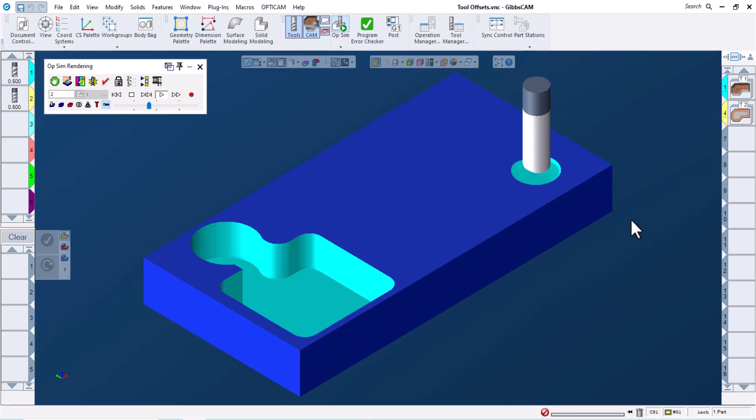In this video, we'll take a look at using operation data to create different tool offsets for different features machined by a single tool to give us more control over individual close tolerance features at the machine.

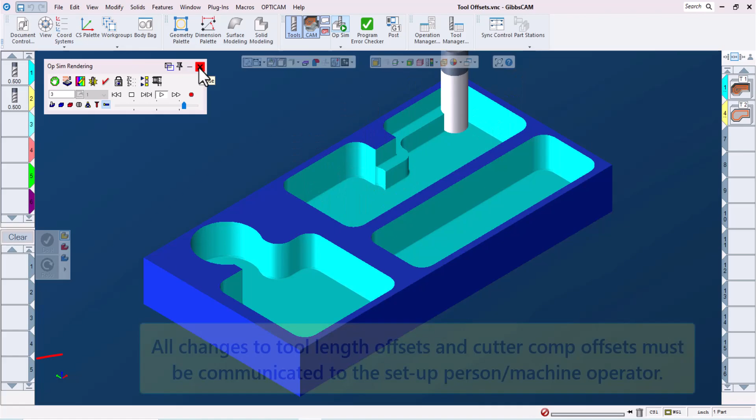If we have a part with multiple close tolerance features, it's possible to get into a situation where adjusting the cutter comp offsets to tweak one feature into tolerance could potentially tweak another feature out of tolerance. So the question becomes, how can I assign cutter comp offsets as well as tool length offsets, if necessary, to different features using the same tool?

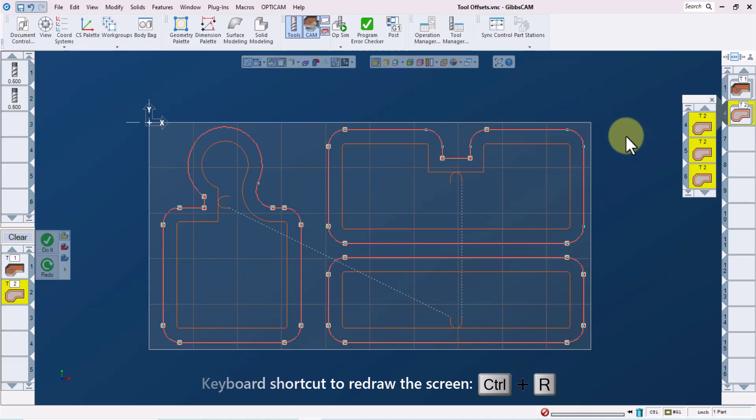With this part, we can see that we're using tool 2 to finish each of these three features. If I select this group of finishing operations and redraw the screen using Control R, I can isolate the toolpath associated with the selected operations. So if it would be helpful to be able to control the sizes of these separately at the machine, we can right-click on Operation 4, for example.

If we then select Operation Data, we can see and manipulate several of the cutting parameters for this operation. Two of the things that we can see and manipulate are the tool length offset for this operation, which is currently set to number 2, and the cutter comp offset, which is also set to 2. This matches what we have in our tool definition. We can see that tool 2 is set up to use tool length offset 2 and cutter comp offset 2.

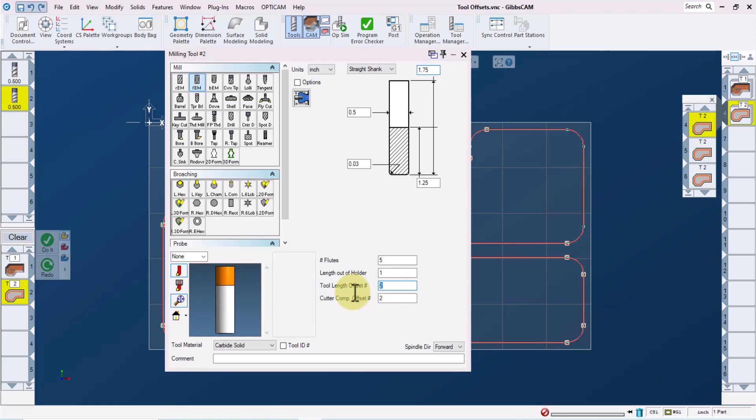Going back to the operation data window, we will leave the settings for this one alone using the default offset settings for this tool. Now let's look at the operation data for operation 5. I like to select it, redraw the screen with Control R to ensure that I'm modifying the toolpath I intend to modify, then right-click on the operation tile and select Operation Data.

Here, I will change the cutter comp offset to 22, but leave the tool length offset at 2. This operation will now use cutter comp offset number 22, but continue to use the tool default, or the same tool length offset as the first pocket. We can lock this change in so that even if we recalculate the toolpath, this change will stay in effect.

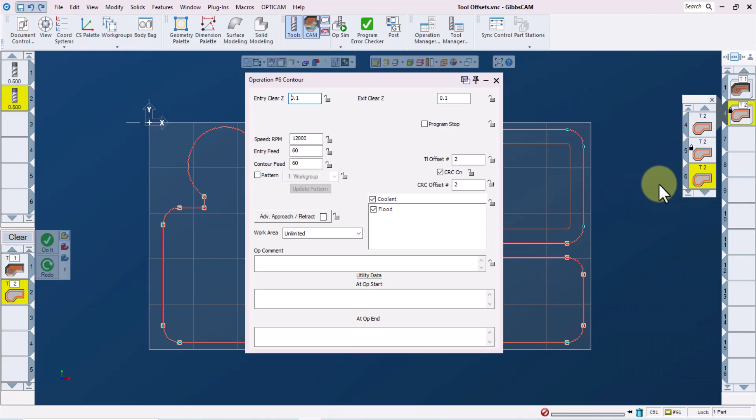Now, let's look at operation 6. We'll redraw the screen and we're looking at this pocket. I'll right-click on the tile and go to the operation data screen. I'll set the cutter comp offset to 32 and lock that in. And for this pocket, I'll define the tool length offset as being 32 as well. Maybe we have a close tolerance for the depth of this pocket.

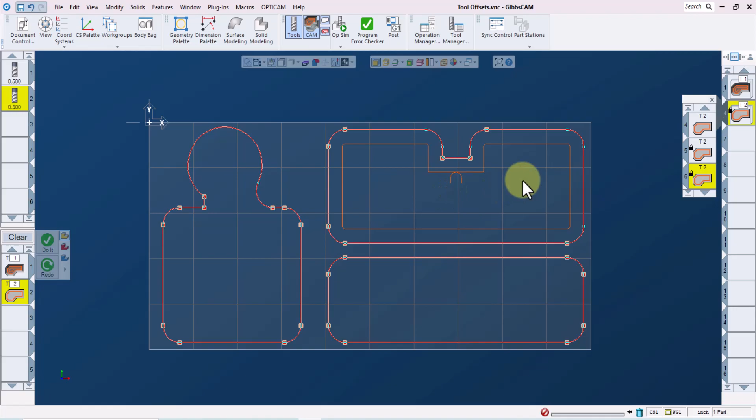We will now have independent control at the machine over the size of each of the pockets with our cutter comp offsets. And we'll also have independent control over the depth of pocket number 3 by using tool length offset 32, without affecting the depths of the first two pockets. These changes can be made at the machine just by adjusting the appropriate offsets.

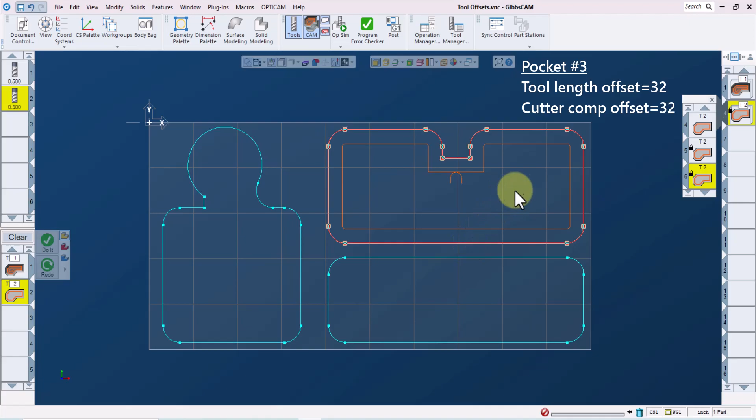So we have tool length offset 2 and cutter comp offset 2 for the first pocket, cutter comp offset 22 and tool length offset 2 for the second pocket, and cutter comp offset 32 and tool length offset 32 for the third pocket. Now let's take a look at the code. I'll go to the posting page, select the post processor, give it a file name, and then process normally.

We'll get our code in the GibbsCAM code editor, and if we take a look at operation 4, which I can jump to by double-clicking here, we can see that our tool length offset, or our height offset, is set to 2 on the G43 line. And our cutter comp offset is also set to 2 on our cutter comp line call.

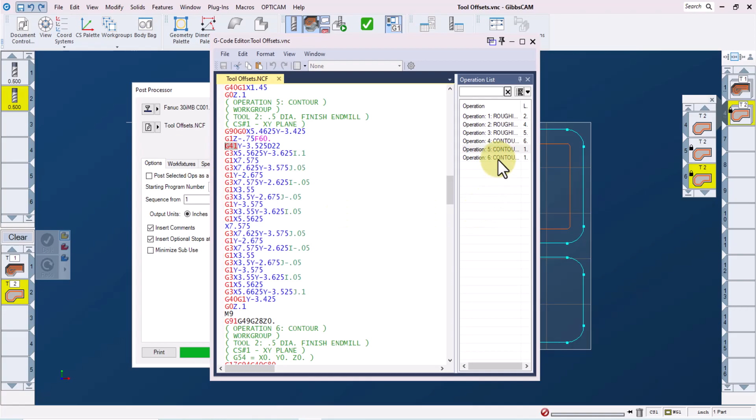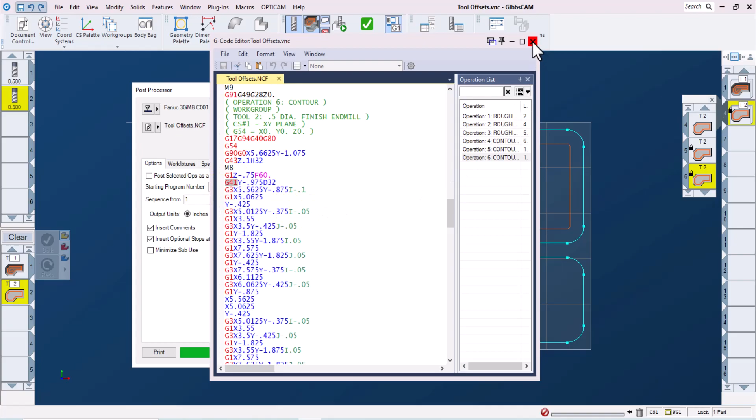If we go into operation 5, we can see that we have not changed our height offset or our tool length offset, but our cutter comp offset is now 22 on the G41 line. So that will read a different offset for this pocket at the machine. And then if we go into operation 6, we can see that our tool length offset is now 32 on our G43 line, and our cutter comp offset is also 32 on our G41 line. So this enables us to control these three features independently at the machine.

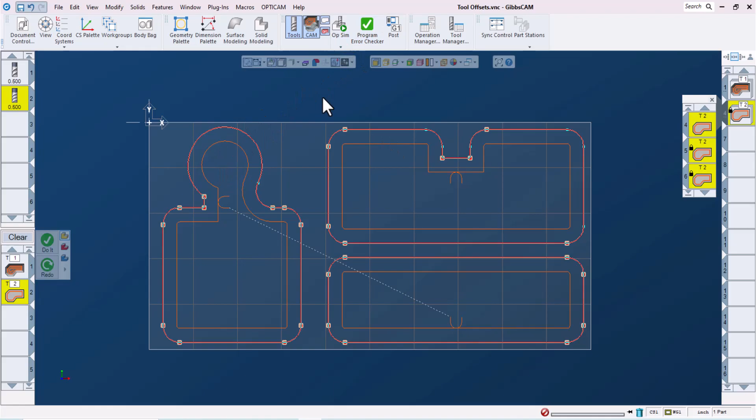Depending on what you're trying to accomplish, what you need to be able to adjust independently, you can modify cutter comp offsets or tool length offsets, or both. This is how to use operation data to modify tool offsets to give you more control over the size and or depth of individual features at the machine on close tolerance parts when you may need to make adjustments for cutting conditions on the fly.